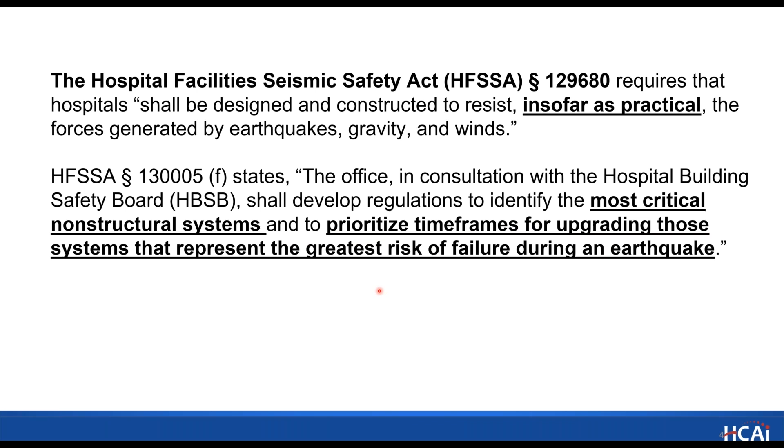Starting with the Seismic Safety Act—this is basically the background of everything. We are trying to prepare hospitals for designing and constructing to resist, in so far as practical, the forces generated by earthquakes, gravity, and winds. The NPC aspect truly focuses on the most critical non-structural systems and prioritizes timeframes for upgrading those systems that represent the greatest risk of failure during an earthquake.

When we talk about NPC, we talk about functionality, but functionality really has three aspects. One is structural—beams, columns, shear walls, slabs, foundation, the skeleton of the building. The rating we use for that is SPC, or Structural Performance Category. Non-structural covers other things in the building—partitions, ceilings, cladding, equipment, pipes, furnishing, contents, elevators, stairs, many things—we call that non-structural, and the rating for that is NPC. And of course, functionality.

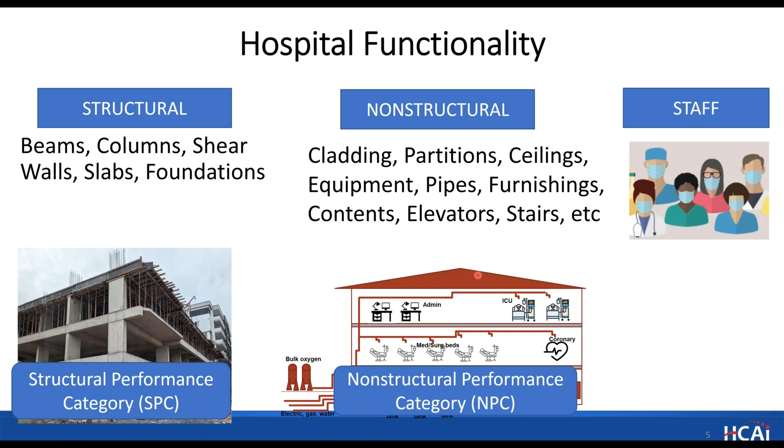Staff makes everything happen. What we're trying to do here is give doctors and nurses all the tools they need so they can do their miracle every day. The importance of non-structural systems isn't new, but the latest earthquake in Turkey showed a renewed emphasis on non-structural systems—they should be tied, braced, and thought about throughout the building to provide healthcare services after an event.

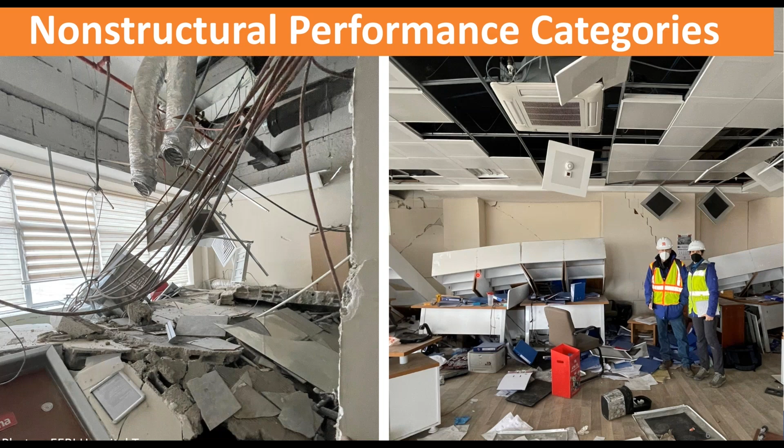So the rating system that I mentioned on the previous slide about NPC has 6 categories. I'm not going to go through this whole table, but basically 1 is the worst, 5 is the best, with steps in between. We're going to go through NPC 4D and 4 today. If you want to know more about NPC 3, I'd go back to the seminar from 2 years ago for more information and handouts.

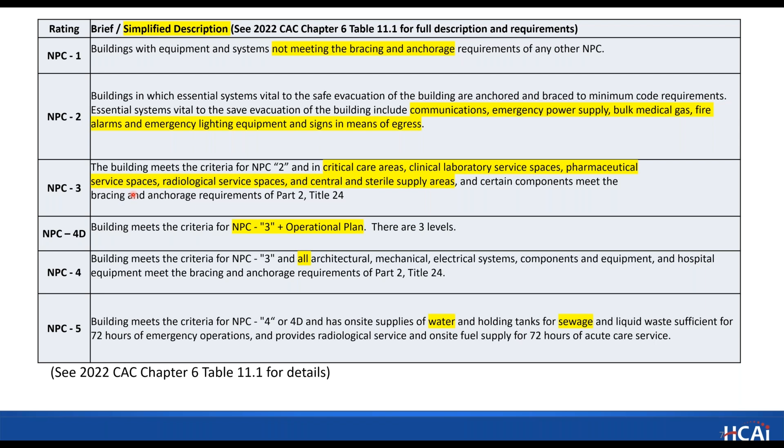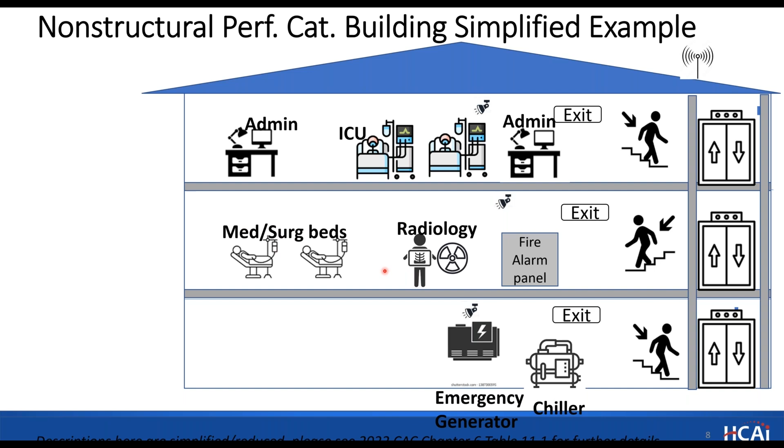I showed this sketch pretty much on all NPC presentations. This is a super simplified example. Let's say this is your hospital building with lots of functions in it: admin space, med-surg beds, radiology, and so on. All of these things work because of utilities: electric, gas, water, oxygen, and so forth. So they are all tied together, a network of systems within the building, between buildings, and outside.

As a starting point, a building's rating is NPC1, meaning either nothing is braced or nothing was looked at or evaluated. If certain evacuation systems are generally looked at, which is pretty much the scope of NPC2—bulk oxygen, fire alarm panel, some emergency generator anchorage, exit signs, some communication—very little, the building and facility gets an NPC2 rating.

NPC3, or NPC4D level 1, looks at some critical care areas such as ICU or radiology, which we call NPC3 areas. Within those boundaries, within the walls of the area, things are braced. So you'll see a bunch of bracing here, bunch of bracing here, but right outside of it, there's no brace required. So in an earthquake, if this utility line breaks here, it won't function there. NPC3 or NPC4D level 1 does not target functionality in those outside spaces—it targets tying everything around the patients so it doesn't fall on them, so they can leave that space safely.

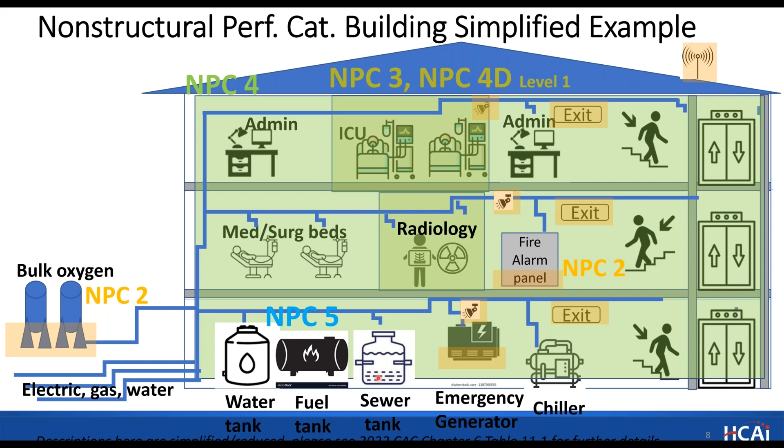As I mentioned, in the last year we received a few thousand evaluation reports. We looked at them, reviewed them all, commented, and sent them back, so we are caught up. We may have maybe 17 or 18 back-check pretty steadily, but if you haven't received a comment from us, talk to us, because you should have received all the evaluation report comments by now.

One common issue is that when we send comments out, if the contact is no longer at the facility, there might be some break in communication. But you can always log into your project and see where the comments are and when that was made.

So I'll focus on 4D and 4 mostly in this presentation. For those of you not quite familiar with 4D, the requirements are set in California Administrative Code, and you can see the details and requirements there. As I mentioned, NPC4D is basically NPC3 with levels in it—levels 1 through 3—and it's all about bracing and anchorage.

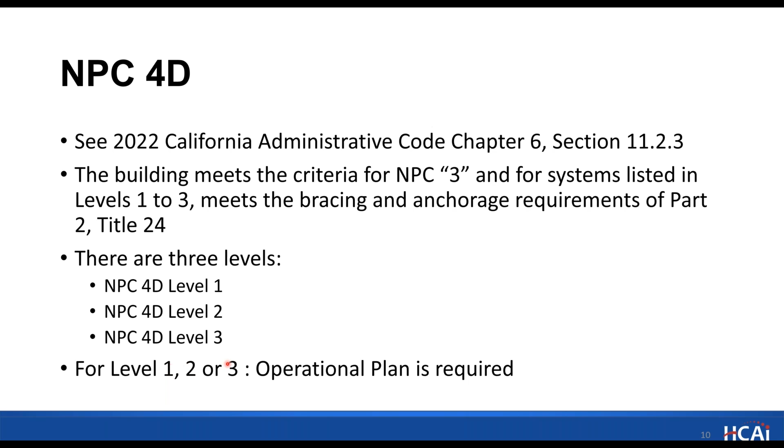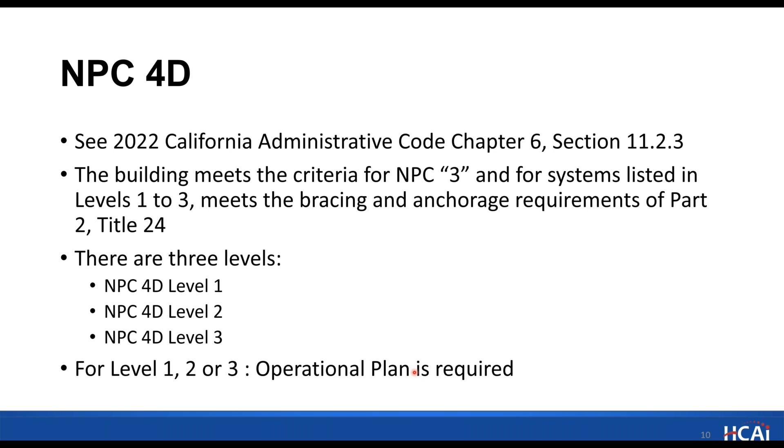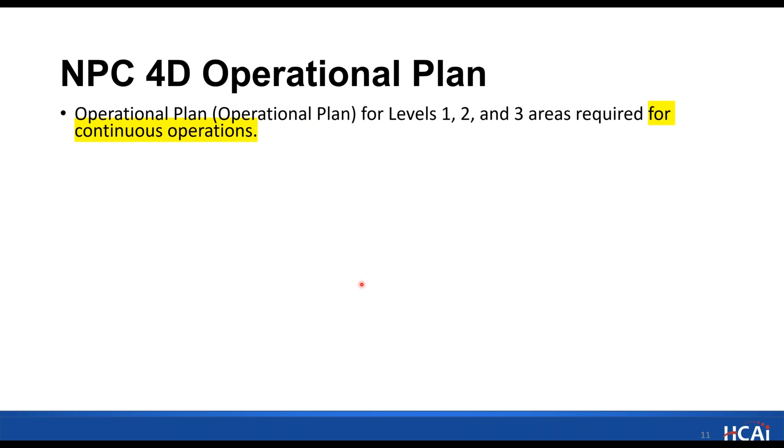On top of that, since the whole building is not braced, in order to achieve the intended operational requirement, there's an operational plan attached that comes with the NPC4D report. This operational plan is the key part of the bracing strategy. Without it, we cannot review the NPC4D evaluation. The operational plan is all about continuous operation—how can we achieve facility-wide continuous operation by looking at things in more detail.

The operational plan should not be prepared just by a design professional—it should be owner approved, and owners should be truly heavily involved in the strategy. It looks at where to brace so you get that functionality, and maybe where not to brace so you have alternative means for that functionality, which I'll come to. Again, we are looking at keeping the facility operational.

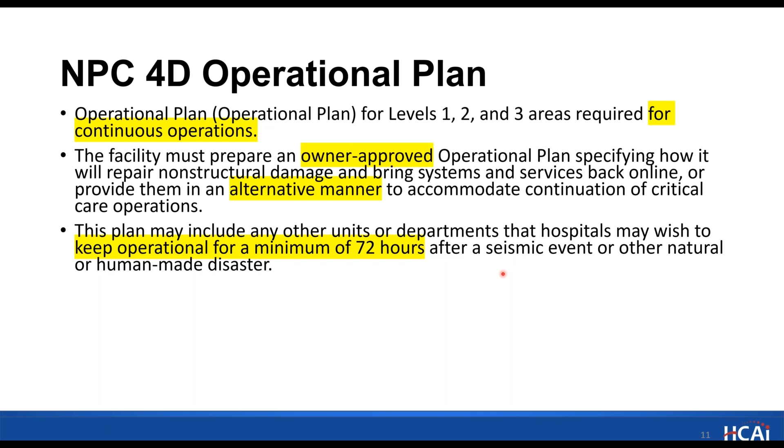The code also says that when you are submitting this, make sure that you include executive summary, narrative, management of utilities, etc.

The operational plan portion, we publish it on our website. Couple suggestions on the operational plans, since we have seen quite a bit of those. Please do not include sensitive information in the operational plan. We publish those, so do not give your staff phone numbers on your operational plans. So please clean those up.

So it is acceptable to provide two PDF files. One talks about the comprehensive version for review. The other one is more reduced for publication on our website. So it's okay to not show the shut-off valve locations in the public version, for security reasons, so that we understand some other concerns. Just let us know.

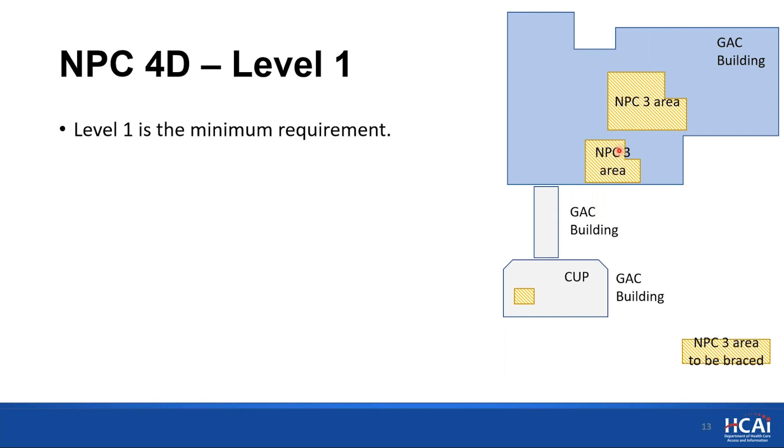Okay, NPC 4D level 1. Quickly, if I go through that - if you have a general acute care building, let me put my laser pointer back up. There are NPC 3 areas, and you have a CUP building, central utility plant, and other buildings that is on the way. Bracing these NPC 3 areas for level 1 is the minimum requirement.

Now, level 2 and 3 are optional, depending on how you want to strategize your facility operation. So some buildings may end up with level 2 or 3, but it's a strategy.

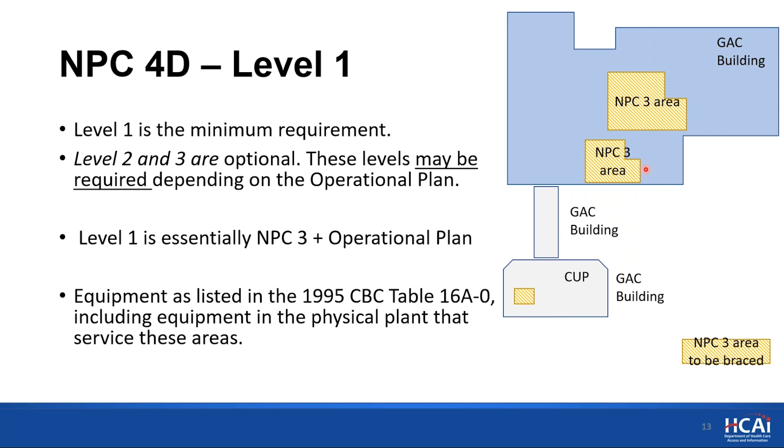One thing that we keep seeing is the design professionals focusing on just the general acute care building that they are contracted to, but NPC 3 and 4D also requires the source equipment to be braced. So there needs to be some survey of where the utilities, where the sources are coming from, and most of the time it's just a central utility plant somewhere. So some panels and some mechanical rooms, electrical rooms - those all need to be braced.

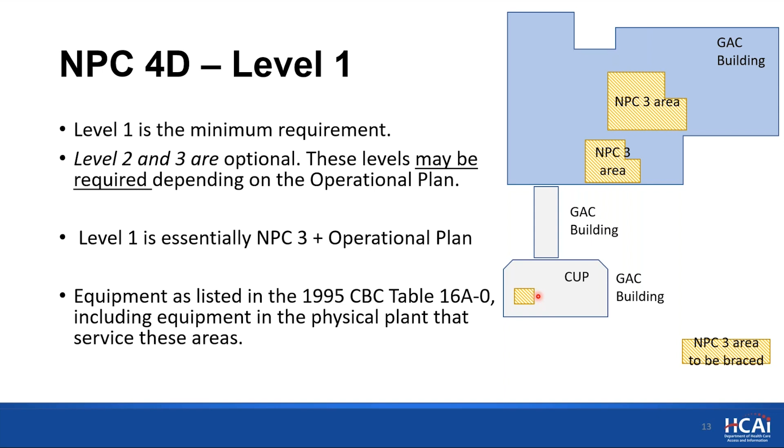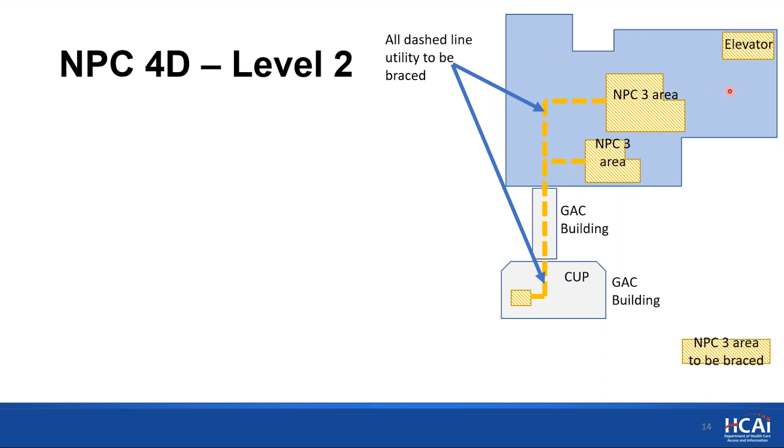Level 2 is about bracing from source to the NPC 3 areas, and these lines are all braced. So basically what we are trying to make sure is that these areas will function reasonably after an earthquake. Now, the other blue areas may not quite function because the utility lines from source to here is not braced.

So when it comes to elevators, level 2 requires - again, it's kicking me out. Interesting. Never had this before. But we'll manage. Okay, here we go.

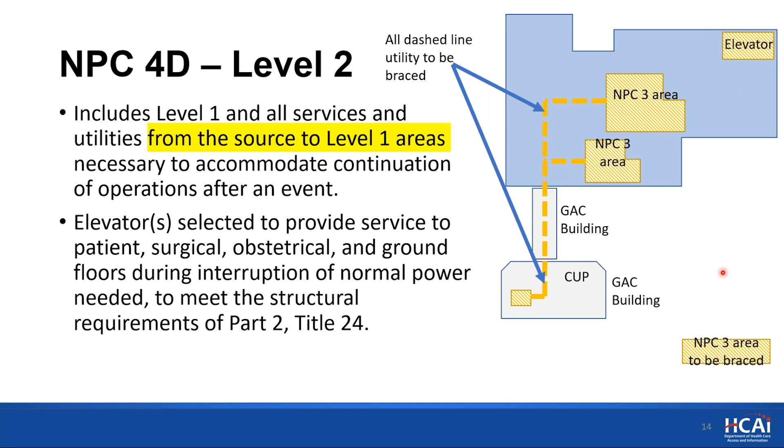Okay, so level 2, when it comes to elevator, you need to select certain elevators to upgrade. Again, operational plan is required. Now, this is something that we use quite a bit.

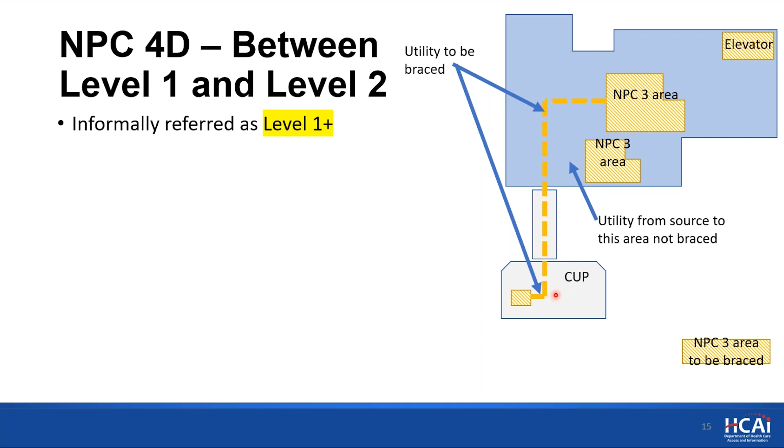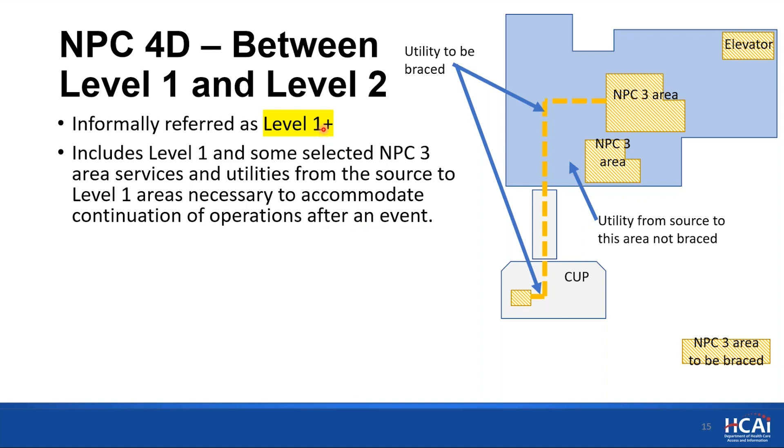Something we call level 1 plus. So it's something in between level 1 and level 2. Just think of two NPC 3 areas right here, and let's say you are bracing from source to that area, so you are basically ensuring functionality here. But this one, you have an alternative somewhere else. So you say, okay, I don't want to spend resources or money on this one because I have a good alternative in another building, so I'm not going to brace the utilities from here to the source. Which means that the critical care areas or the NPC 3 areas are not all braced. So your rating is still level 1, but your operational plan gets a whole lot easier. So there's this surgical approach that you can do to optimize what you can upgrade. And again, there's no such thing in the code that says plus - it's just a strategy between 1 and 2.

Okay, level 3 is basically level 2 with more areas that you choose. So the rules are the same, there's really nothing new there. NPC 4 is, like I mentioned, bracing pretty much everything - architectural, mechanical, electrical equipment, and so on and so forth.

One common question that we got is about NPC 3 area exceptions. So those exceptions don't apply to NPC 4 for upgrade.

And most of the time, there are a lot of past projects in the building that you can take credit for. So just think of it like you have a map with a bunch of areas that are already explored and upgraded. It's just a matter of finding gaps between those past projects and focusing on those. But please make sure that those projects that were started in the past were closed in compliance. If the status of those projects is closed without compliance, you cannot take credit, or you need to go a little more document route to see what happened in the past.

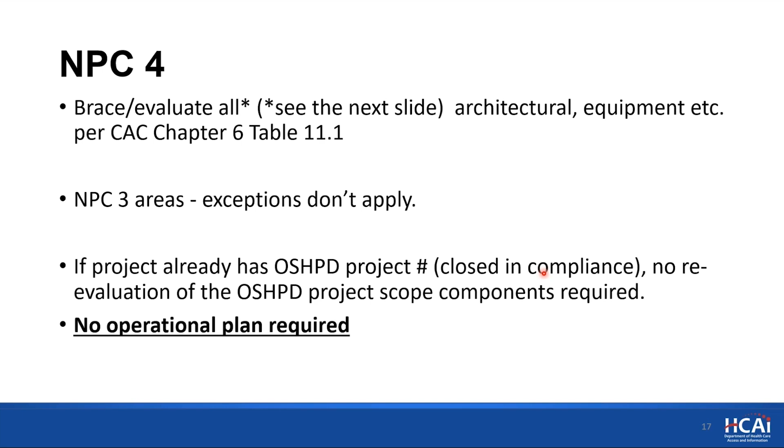For NPC 4, the nice thing is operational plan is not required, because if you brace everything in the building, the expectation is it will reasonably function. But again, no one is guaranteeing 100% everything will work - it's just a reasonable assumption.

Now people say, is it really bracing everything in the building? Well, there are some exceptions in NPC4, and I'll highlight a couple things. When something is attached to an architectural item, like walls, people ask should I upgrade all the light frame walls? The exception is when 250 pounds is attached to light frame walls, and if a single stud gets 250, then you need to upgrade that stud. 250 per single stud is a very big piece of equipment attached to the wall, so this doesn't happen frequently. The focus of upgrading light frame walls is pretty minimal.

And then there are other things, like if I put a 3,000 pound equipment, how much evaluation, how much more should I go? It's pretty flexible on how much you should go. So it's everything, but not really everything.

Now with the rating systems I mentioned, where are we on the building inventory across California? This is our latest pie chart, about a couple weeks old. The SPC, structural performance: we have 655 SPC2 buildings and 38 SPC1 buildings. These need to be resolved before 2030. The SPC1s are being resolved as we speak. 3, 4, 4D, 5 are actually good beyond 2030 - these are the good structural buildings.

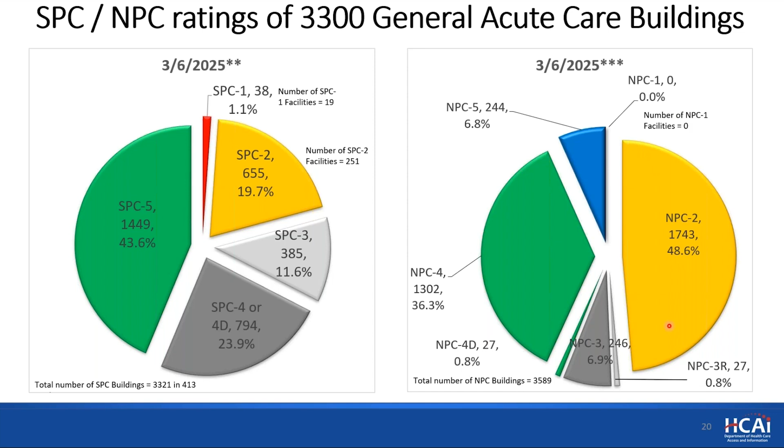Where can you find this information? The best place to go is this link, this website. You will find not only SPC, NPC, but lots of other details about your facility and buildings. We add new tabs every year or so, but some tabs have been there for decades, or a decade or two. Facility info, building list, seismic info - these are the most used tabs for NPC for the building operational plan, and the newest addition is building compliance plan, which I will touch on in this presentation. But please go to the previous presentation to learn more about the building compliance plan.

If you click on the building list seismic information, this is what you see. I want to focus on one column, but in this table you're going to see the building details, the name, the year, the code, the height, and the rating. We keep updating many things, but this NPC status really talks to what we are trying to achieve with this presentation. This gives the status of the NPC upgrade. Now you may say, what do these things mean? There's some text, so I broke it down. Let's take a look at the options here.

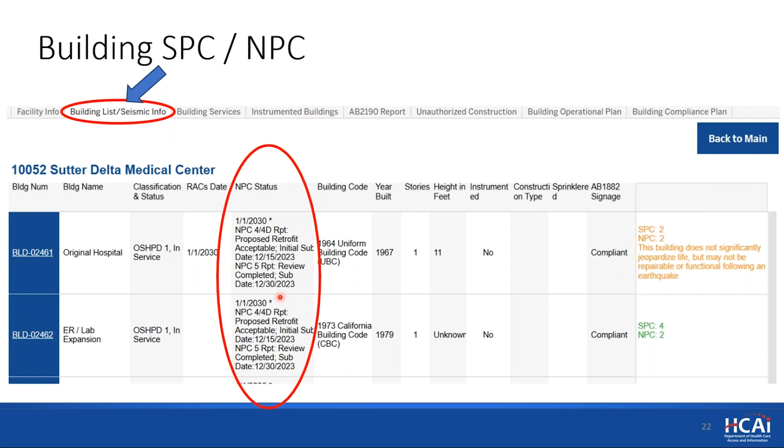If the NPC status shows not submitted, basically it's pretty straightforward - the evaluation, we have not received the evaluation report. If you think this is a mistake on our website, please reach out to us and we will fix our mistake. But if it is not submitted, it shows not submitted.

Awaiting review means the report was submitted or resubmitted for back check and it's queued for review. If it says in review, which means it got triaged so it has the right components and documents in it, now it's in review. If it says review completed, it means we sent the comments out - please respond to the comments.

If you see proposed retrofit acceptable, it means we received the evaluation and accepted the scope. We sent a letter saying we are accepting the proposed retrofit, and the next step is putting together the construction documentation and building it. If you see intent to remove general acute care, GAC, it means we received a formal letter from the facility saying they intend not to continue general acute care services in this building after 2030. So we put this building in a different category, which I will talk about later.

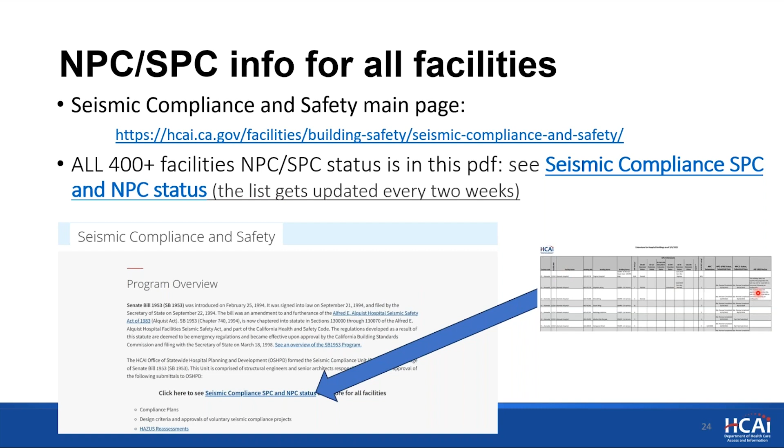If you go to our website, Seismic Compliance and Safety, you're going to see a link that shows everything. So 3,000 something building statuses are there. It's a PDF, and you may say, well, I need Excel. The way we created this PDF from Excel, if you save this PDF as an Excel file, it will convert to Excel very cleanly. It's by design, so you can sort and do all kinds of statistics if you want to.

All right, so now we know the rules, now we know the inventory, what are the deadlines? I want to start with NPC 3 compliance deadlines. I know this is 4D and moving toward that, but we still have a little NPC 3 compliance deadline issue. We have two seismic design categories, D and F. F is very high seismic area, D is high seismic area.

There was a deadline that says all the NPC 1s and 2s need to be NPC 3 by this date if you are seismic design category F. So out of 43 NPC 2 buildings, we have 40 NPC 2 buildings with this deadline.

Now, about 24 of those are done, they are in the process of basically getting the paperwork resolved. So my target is 16 buildings in 9 facilities that need action immediately. If you haven't heard from us, that means you are not in that list. If you did, you know.

Okay, the other deadlines. For the NPC 4, 4D, and 5, the NPC compliance deadlines have been set for a long time. But recently, in the 2025 code, with the addition of AB 869 and the California Administrative Code revisions, there were two little additions in between. The first one: January 1st, 2024, that's the submittal deadline for non-structural evaluation for all hospitals. So there's no change there.

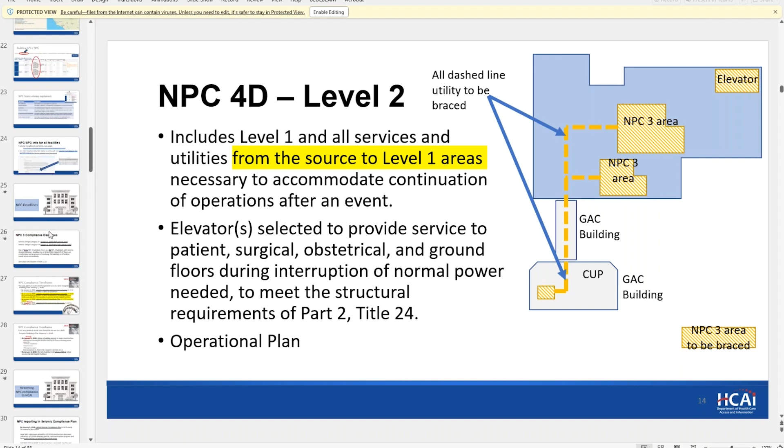So by January 1st, 2026, all facilities need to submit a seismic compliance plan. Again, please take a look at the previous webinar. By March 1st, 2026, all hospitals, whether you are seeking delay or not, need to submit construction documents for NPC 4, 4D, and 5.

By March 1st, 2028, that's the deadline to obtain a building permit. And for the ones that are not AB 869, the finishing date is January 1st, 2030. Whatever extension the AB 869 facilities get, that will be their deadline to finish construction.

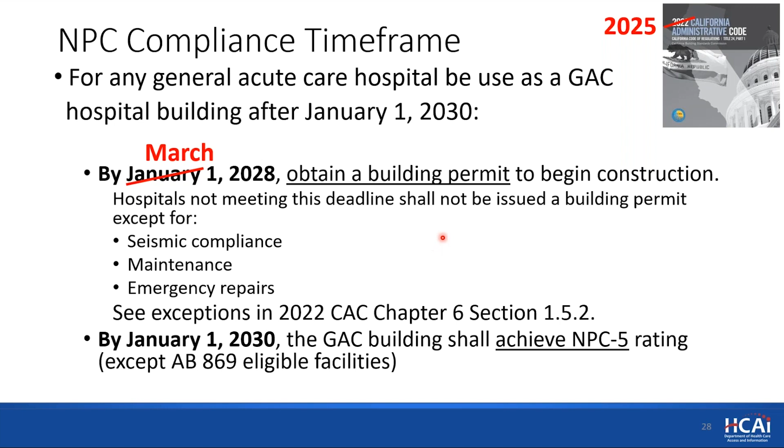You may ask, why did January move to March? Because we are a deadline-driven industry, most people submit at the last day or the day before. January 1st is generally not a good time because everyone is on vacation, and bringing the design professional back from Christmas vacation when things are needed is not fun.

Reporting NPC compliance to HCAI: so those are the deadlines, but how can we keep track and report whether they are met or not? We will do all of that in our new automated seismic compliance plan. Again, I highly recommend looking at the previous webinar.

The way we will be asking everybody is please put the NPC milestones in the seismic compliance plan for 4D and 5, and the time of submitting the construction documents, the time of getting the permit, and completing. We're going to be asking you to put all that in the seismic compliance plan.

So how do you do it? Basically, you use our guide. This is the ESP e-services portal user guide, section 21. This walks you through step by step on how to log in, access, and use the menus. It's more like a software user guide. We also published Pin 80, so you can look at the background behind it.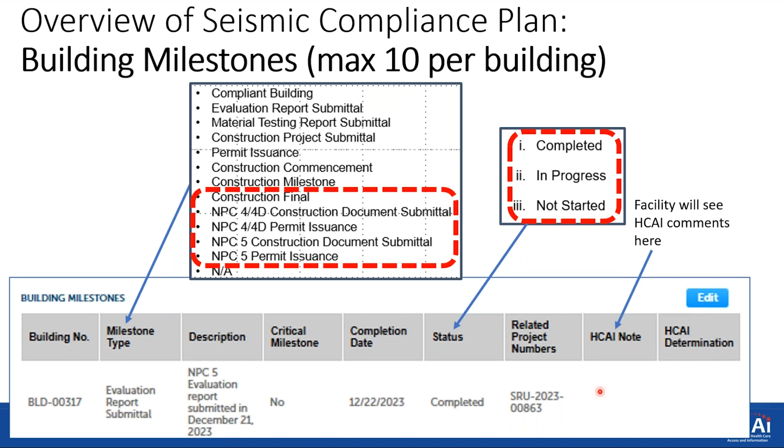Again, I basically noted down how we're gonna do this. Then there's a little nuance on 4, 4D, and 5. For 4 and 4D, each building has its own plan, so some upgrade to 4D, some upgrade to 4, some demolish it. So it's building by building.

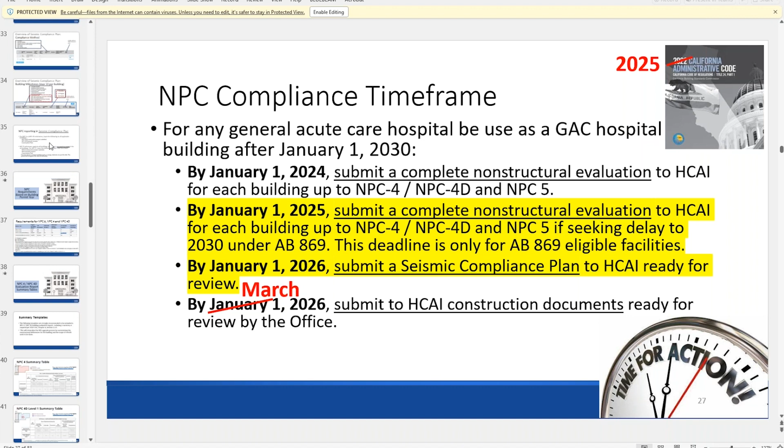We'll have an IT talk. There we go.

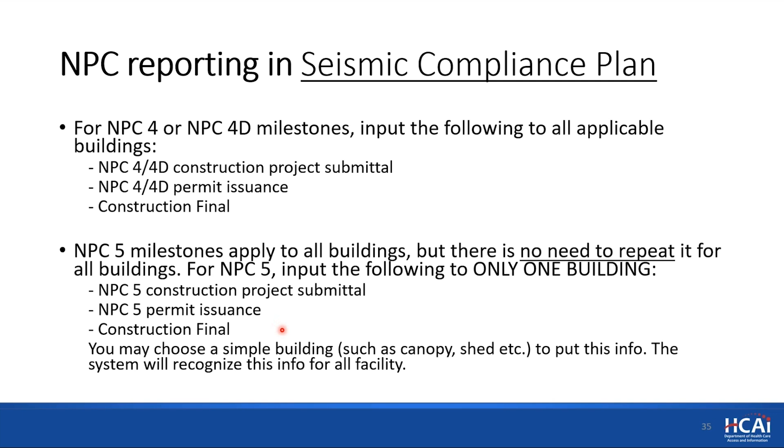So you can choose a simple building like canopies and sheds, and you can put the NPC 5 dates there. And when you do that, the system will recognize that there's an entry of NPC 5, so we will assume that this is for the entire facility, which generally is.

Okay, so now I'm gonna start going into the details of NPC 4 and 4D. I'll talk about some nuances, some frequently asked questions. So we'll basically touch on, again, a lot of nuances here.

One thing that I would start with is the big picture of the building. The older the building gets, the more scope of work that needs to happen. So we have categories, and the best place to start is to figure out how old is the building. What was the permit year of the building? What was the construction year of the building? So start with the age.

When you start with the age, the very important thing to identify is who was the permitting agency. Was it local, like city or local jurisdiction, or was it OSA, which is the agency, or kind of OSHPD, and then we split from OSA and we became OSHPD. Was it under the OSA jurisdiction, or was it under our jurisdiction? Depending on the year, the scope gets very minimal or nothing, and as you go towards local, the scope gets more. So prior to 1973,

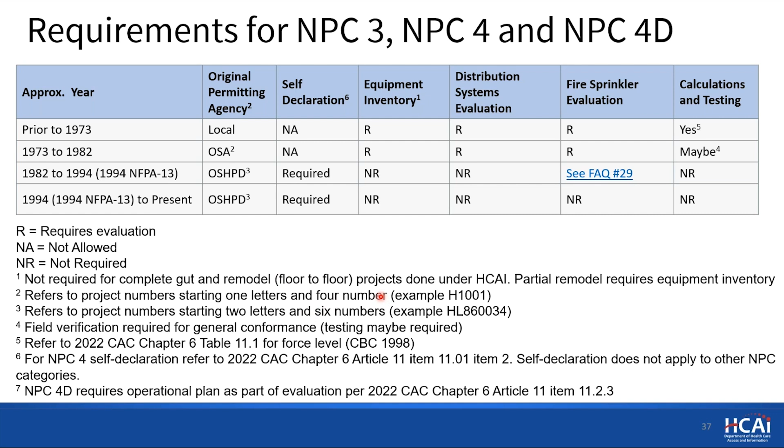So there is some upgrade needed in this era. If you are after 1994 and the fire sprinklers are 1994 NFPA 13 designed, then you have no scope of upgrade in 4 and 4D. You still have NPC 5 to do, but again, this is not about bracing, so take a look at the footnotes for this. But again, it's very important to start with the age.

The reports, once the evaluation is done, it's important to summarize what's the scope of work, like what are we trying to upgrade, so the engineer knows. But it's sometimes very difficult to track what's truly needed.

The code says a narrative and a summary table is required, but after seeing many evaluation reports, we started commenting that you've got to have a summary table that everyone can follow. So we came up with a template. We are strongly recommending to include a summary template on the first page. Again, we are here today, we won't be here tomorrow, your engineer may not be here tomorrow, so to keep track of what has been done, the summary tables are super important.

So we came up with a summary template. You can click on this link and download it if you choose to. I'll explain this table a little bit because it's important.

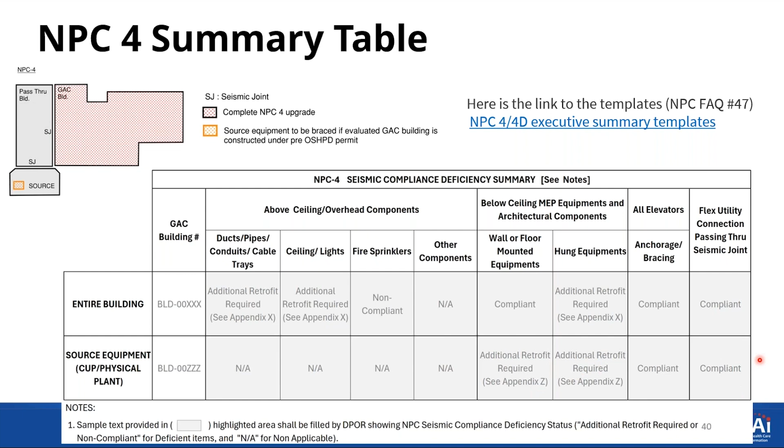And same for source equipment, what's the status of that one. NPC 4D level 1 summary table is a little different than NPC4. Again, some similar items, but...

Now you're not talking about the entire building in terms of bracing. You are now talking about areas within the building and the source equipment wherever those source equipment are. So give us the details on what the plan is, so that when you go to this building in the future for hung equipment, if you open a project and finish the retrofit, you can come back and say yep, this item is done under this project, so now it becomes compliant. Well, okay, you still have those two items that we need to see projects for. So it starts addressing things on a more high level.

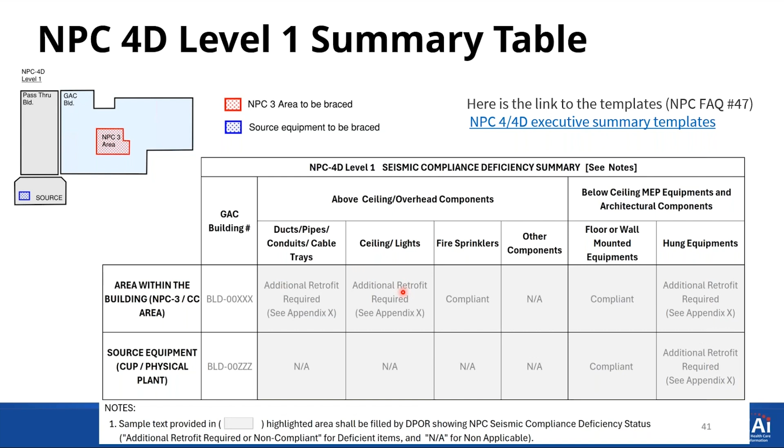NPC 4D level 2 and 3 summary table is again a little different than level 1. Again, you can download the templates here. I want to quickly talk about the setup: you have the source building, a pass-through building, seismic joints, and NPC3 areas, additional areas, elevators. These are basically surveyed, so these are utilities to be braced. So how are we going to prepare a summary table for that?

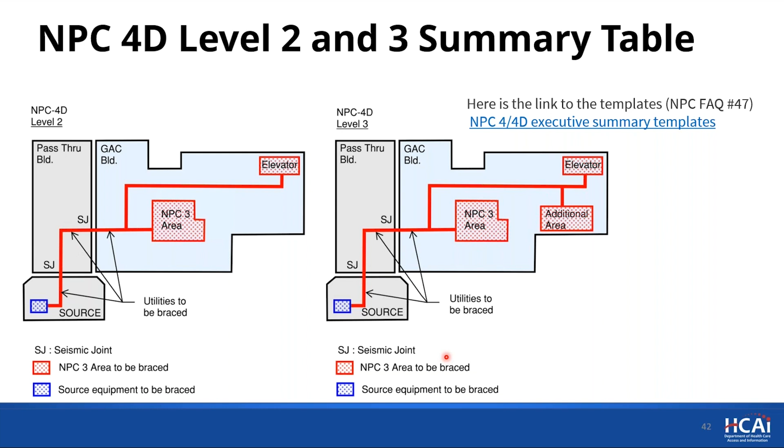Again, I'm going to start with the bottom line. The source equipment, tell us which building it is in. Tell us where the utilities will be passing through, because those are the buildings that you will have projects in. And utilities in passing, again another pass-through building, and this is your main building. If you identify these, then you can start checking these things off as you make progress.

The reason we are emphasizing pass-through buildings is NPC projects come with many little multiple projects, so it's very easy to keep or lose track of the focus. When you have many little TI projects touching many different parts of the area, you may start wondering, well, did I do this pass-through building or not? So anyway, this is something helpful. If you have better suggestions, we are open to look at it. All we are trying to do is make the scope and tracking easier.

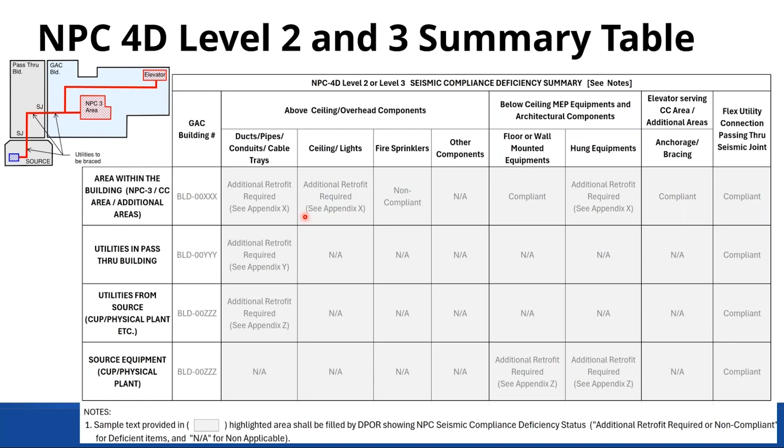So then we'll say, okay, then all we need is the NPC3 area bracing, not source to area. So again, this gives us a big picture on how you're approaching your functionality.

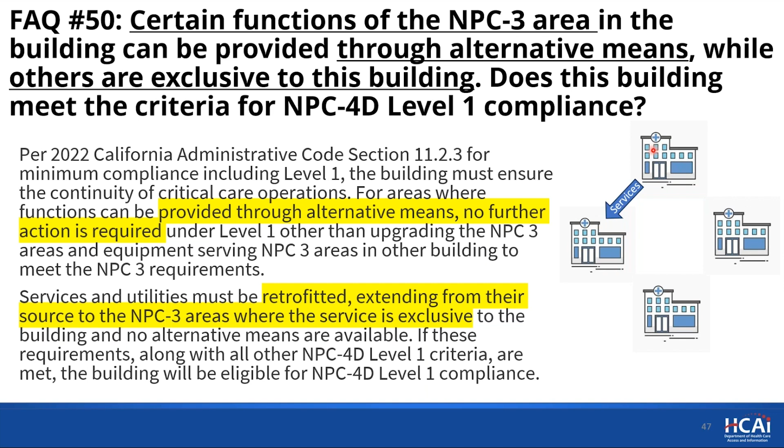What if I have the same facility and I want to do level 1 on every single one of them? What we started seeing, which we are pushing back on, is: this building will have the services somewhere else, this building has services somewhere else, this building has services somewhere else. So the entire facility cannot be NPC 4D level 1. You cannot just keep the services out of this building within the same campus.

The argument we keep seeing is, we're going to shut down the facility, and there's another facility probably within, I don't know, X number of miles. Again, an evacuation is the last resort option, not a design target. We are designing the facility to provide services after the earthquake. So therefore, all buildings in the facility cannot be NPC 4D level 1.

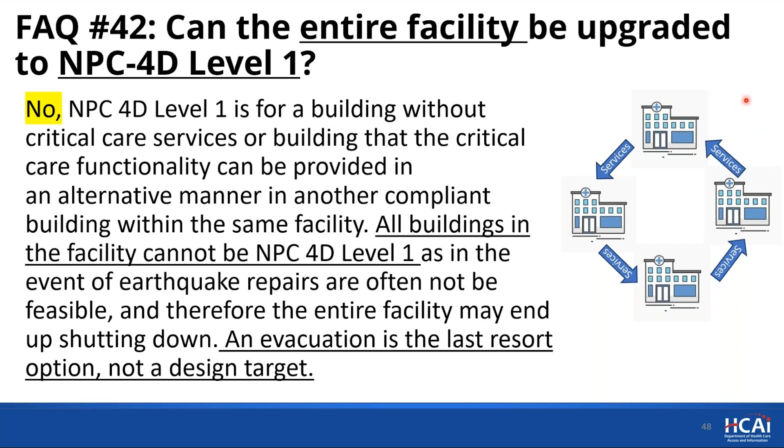What is the minimum number of elevators? For level 2 and level 3, a minimum of 1 elevator. This is a pretty basic requirement, so that hasn't changed.

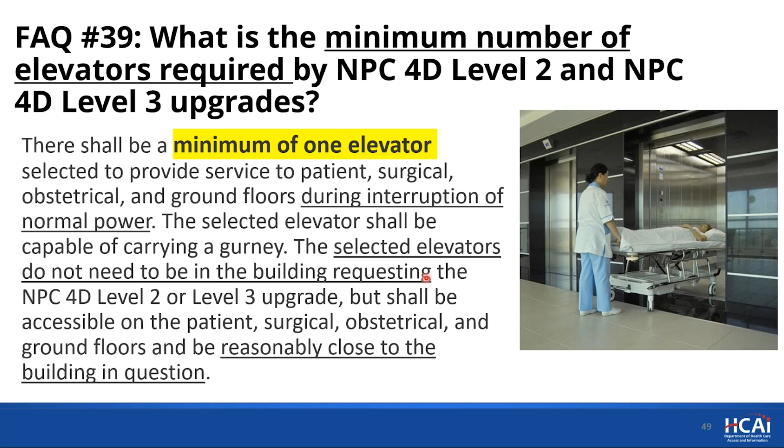The other question we get quite often is: I have a central utility plant, there's no inpatient services in it, so can I do level 1? This means that the equipment will be anchored, but all the utilities above will not be anchored. So obviously the operational plan will say the entire facility will be shut down because the central utility plants are so critical to the facility. A non-functioning central utility plant is basically detrimental.

Rather than going back and forth many times on the operational plan, we are basically getting to the point of saying that central utility plants as standalone buildings need to be NPC 4 - meaning please brace everything in those buildings. Again, the code doesn't say central utility plants has to be NPC 4, but the code says your operational plan needs to ensure continuous functionality. So not bracing the central utility plant defeats the purpose of the operational plan. So cutting the chase, the central utility plant needs to be NPC 4.

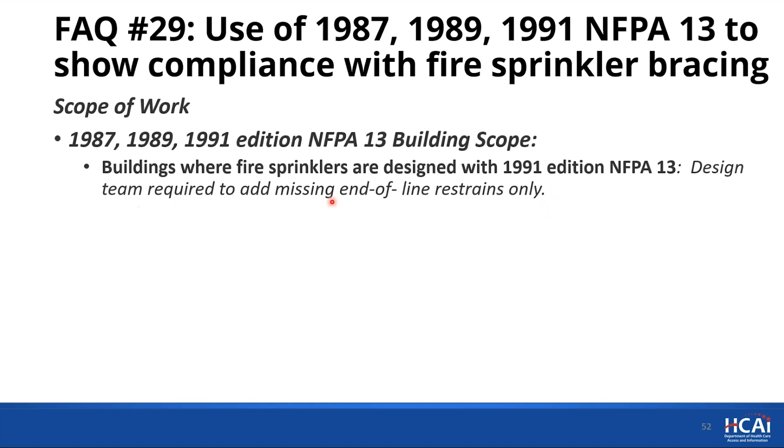Fire sprinklers. I presented this in previous webinars, but I'd like to touch on it because for OSHPD buildings from 1982 through roughly '94, most of the time the only scope is fire sprinkler bracing upgrade. The upgrade isn't just black and white between codes—there's a progression of requirements throughout the NFPA for fire sprinklers. So if you know what version of NFPA was used, we can tailor the scope more efficiently. If the building is 1994 NFPA, you're good.

If you're on the 87, 89, or 91 edition, then some verification or upgrade is needed. Generally the concern with these editions is the end-of-line restraints. In an earthquake, those fire sprinkler heads basically get cut off and flood the whole hospital, so we want those secured.

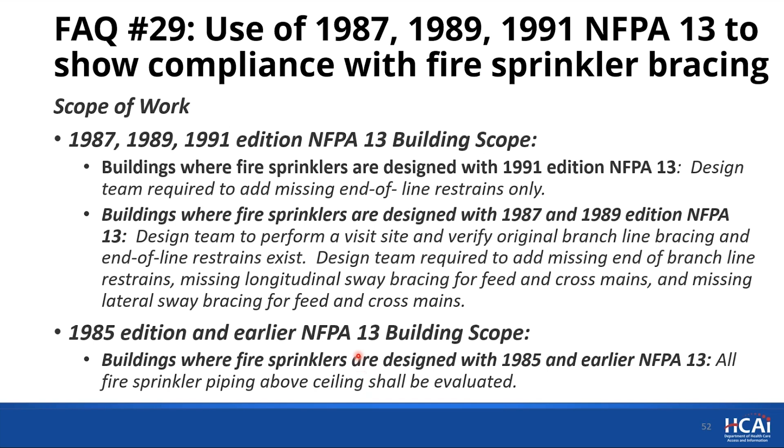Going back further to around '87, you start seeing missing branch line bracing in addition to end-of-line restraints. It's a bit of a mixed bag, so don't assume the worst—have your design professional look at several places in the building to come to a conclusion. Before the '85 edition, an upgrade is generally required.

Some other frequently asked questions. This comes up quite often, especially now that we're going into the construction document phase. Hospitals come and say, we decided to fully renovate this area, full gut floor to floor. So should I really go through the inventory of things I'm going to demo? What's the point? We agree—so in the evaluation report, cloud that area and state that full renovation will be done for all items. Then you don't have to include the list of that equipment in that area.

But that means you need to submit a project by March 1st, 2026 for that renovation, get a permit for it, and complete the renovation by January 1st, 2030. So basically your retrofit is carried out through different projects.

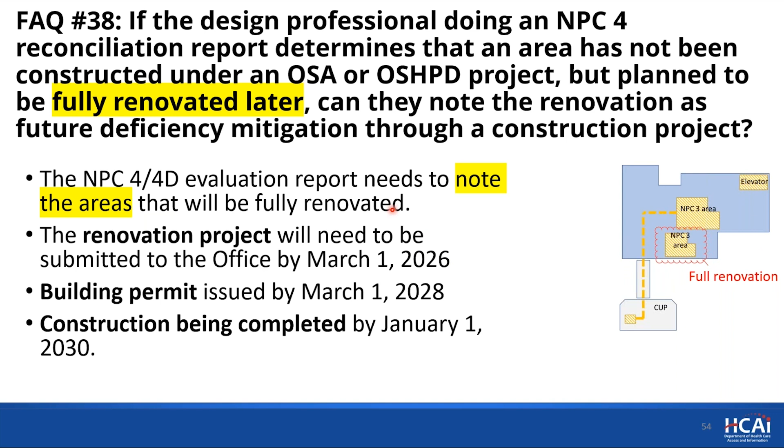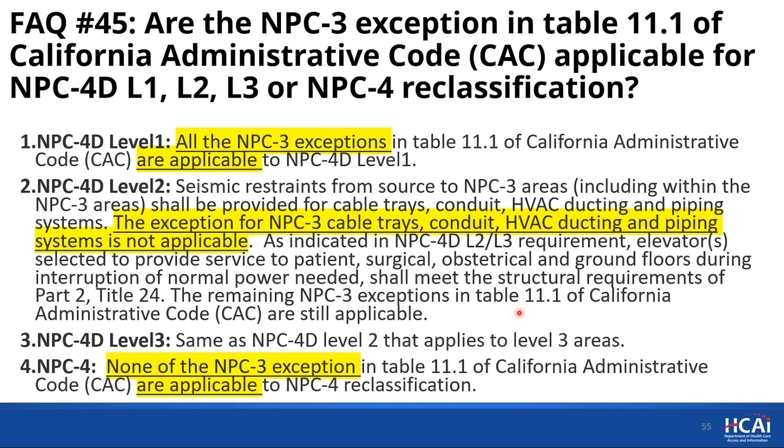Now, this is another big thing: flex joints.

As more buildings come to the inventory of a hospital, things get added, the utility pipes are extended to the next building, and then the next building, and then the next building. And during those changes in the campus, a lot of times what we started seeing is...

When the utilities are passing through the seismic joints, not all of them got flexible joints. So these things do allow movements between buildings. Bracing a pipe is much easier than cutting a pipe and putting a flex joint. So we came to a conclusion that it may not be practical to cut these pipes everywhere. It's just you need to shut down the hospital a lot of times. So in many scenarios that we have seen, it's just detrimental to the whole campus if you try to cut every single pipe to make sure that this is done.

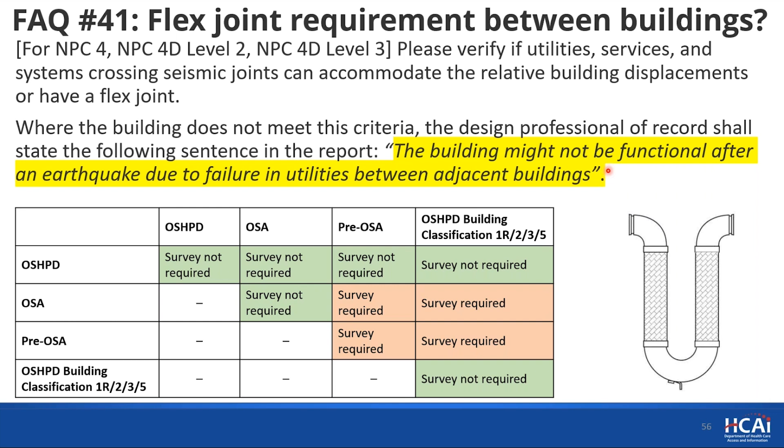The requirement for piping suspended by individual hangers - this comes again as a frequently asked question a lot. Again, the codes do change over the years, so that's why it gets thicker and thicker as the code years increase. So the exceptions do change.

So people say, well, I like the exception in 2019 code, but I don't like it on the 2016 code, or vice versa. Can I do a mixed soup of exceptions throughout many code cycles? The answer is no. You need to stick with one code that you are applying and stay consistent with that code cycle. So people say, oh, I'm going to use 1998. 1998 does have exceptions, but it's not as detailed as the subsequent codes. So if you're going to choose 1998, you have to live with the uncertainty of those exceptions. If you use a later code, things get more clear, but some flexibilities on your hand may go away. So anyways, your design professional will decide which code cycle to pick and stick with that. The code says 1998 code or later codes. It's not a combination of.

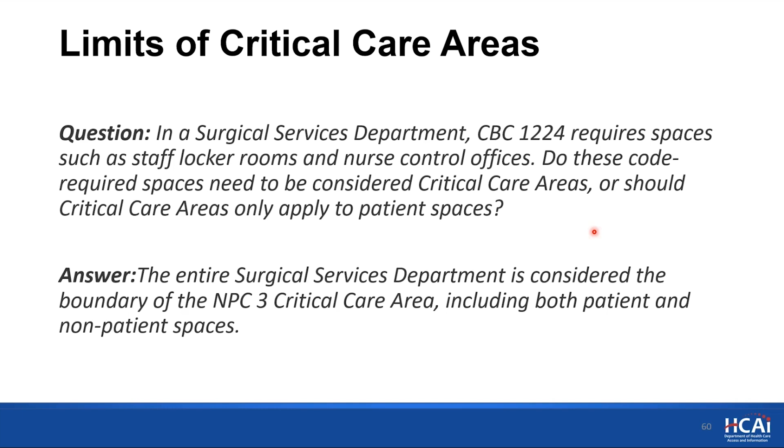What I want to point out is there was a slight revision in the 2022 code for testing existing anchors for equipment. So we no longer require shear testing if there's no tension in that anchor, and there's a little more clarification about how to test the existing anchors. So it became a little more palatable and flexible in terms of testing requirements.

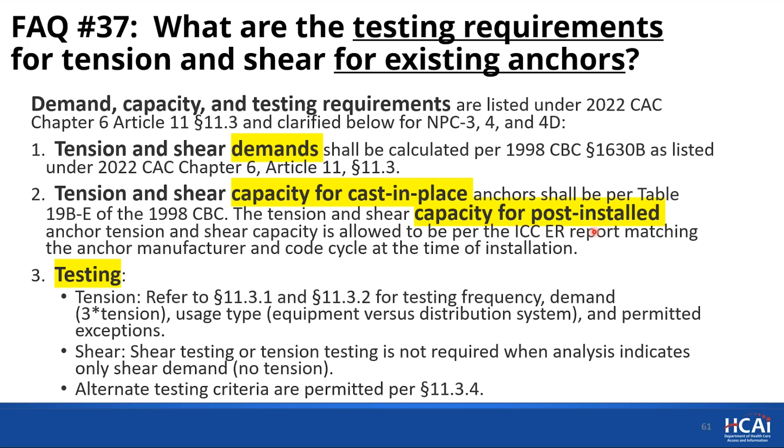Okay, what if you have a building that won't provide acute care services beyond 2030? What are the steps that you want to take? Maybe you already gave NPC for 4D report. So what are the options?

Number one thing is, please submit an application with a letter of intent. It's just one page from the facility saying that our intent is not to continue GAC services in this building beyond 2030. You may say, well, then why are we putting a project if we're just going to send the letter? The thing is, the intent may change, the intent may evolve.

So we want to keep track of all those changes within a project number. In the seismic compliance plan applications, we specifically added a line item for you to use, and it says intent to remove GAC.

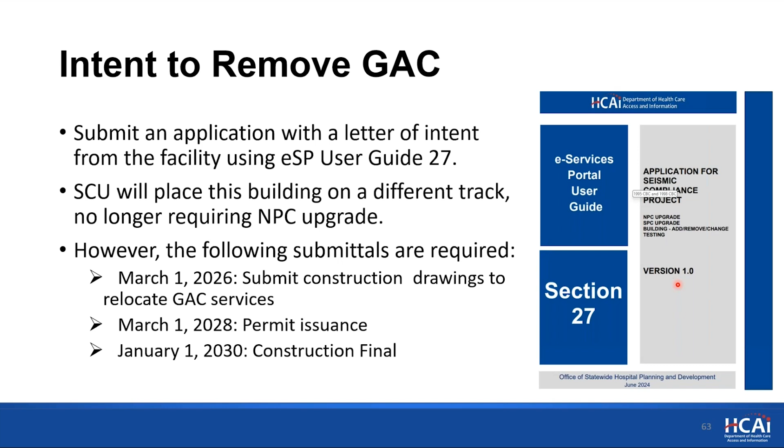But once you do that, we publish that building as intent to remove GAC, and we put you on a track with the expectation that you're going to be submitting construction drawings to start removing those services, by March 2026 for the drawings, March 1st 2028 for the permit issuance, and finally finishing January 1st 2030. With AB 869, that construction final may change a little bit, but the deadlines pretty much remain the same.

Now I'd like to spend the next half an hour on our new advisory guide, A13. We published this back in November, December last year. Since we are now going towards the construction side of things on the NPC, we came up with this as an option for facilities to consider to expedite the construction.

Again, this A13 guide is not a magical solution. It's just an option. If it makes sense, we recommend you use it. If it doesn't make sense, the traditional method may actually work better. So this guide is only for existing ceilings and above-ceiling utilities.

The reason we came up with this is that during evaluations, a lot of times the design professional could not see or were not allowed to enter into several ceiling spaces, and the utility evaluation was either missing or not complete. Going into those spaces many times, disrupting operations, was a huge issue for some buildings.

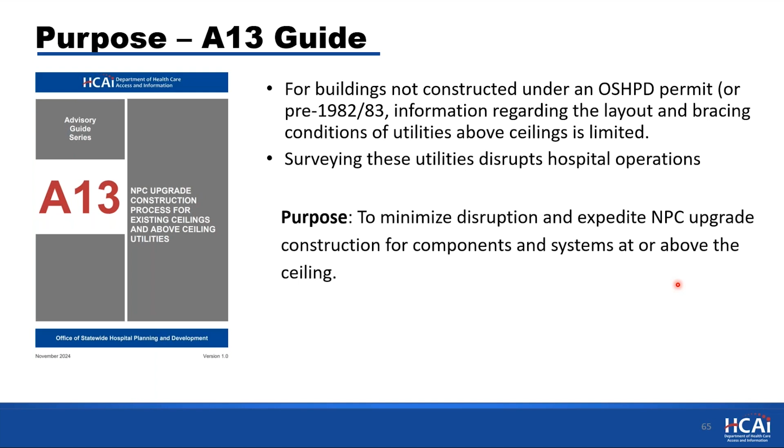I'm going to emphasize this probably ten more times: the guide is only and only for existing components and systems for NPC upgrade. This guide should not be used for new equipment, wall-mounted equipment, floor-mounted equipment, new systems, or deferred submittals. Again, this flexibility is coming from the reason of not seeing what you need to brace beforehand.

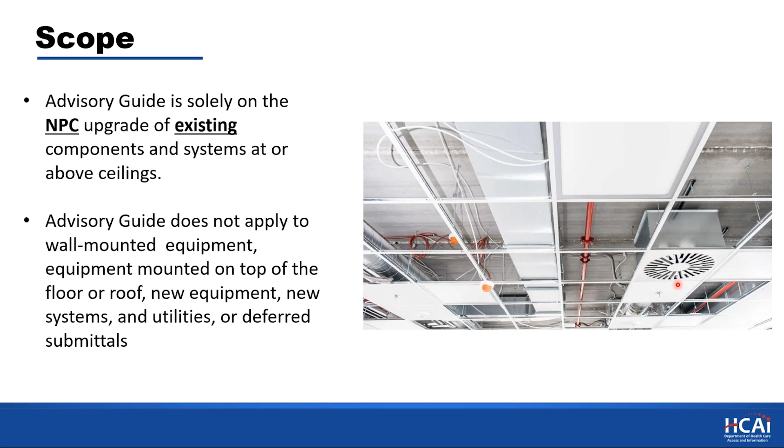Deferred submittals are not permitted, and I'll come to that in more detail for the A13 guide. If you have a TI project, we want the TI project to follow the standard process, but that doesn't mean you cannot use that room with the A13 guide. You can, and I'll tell you how. But make the TI project traditional, with the NPC upgrade of utilities as its own project.

Okay, the first question: should I use the A13 guide for my building? How would I know that my building is a good candidate for the A13 guide? The starting point is, how much do you know about the conditions in your building? That's the big question. So let your design professional look at all the existing drawings, details, and site visits, gather as much information as possible.

Have an understanding about what comfort level of detail you have on hand, on paper. If the survey is comprehensive and the DPOR says that this reasonably reflects existing conditions—not 100%, nothing is 100%, but reasonably—then if that's the case, you don't need the A13 guide. Go to our typical HCAI process, because if you know things, you know where to put the braces.

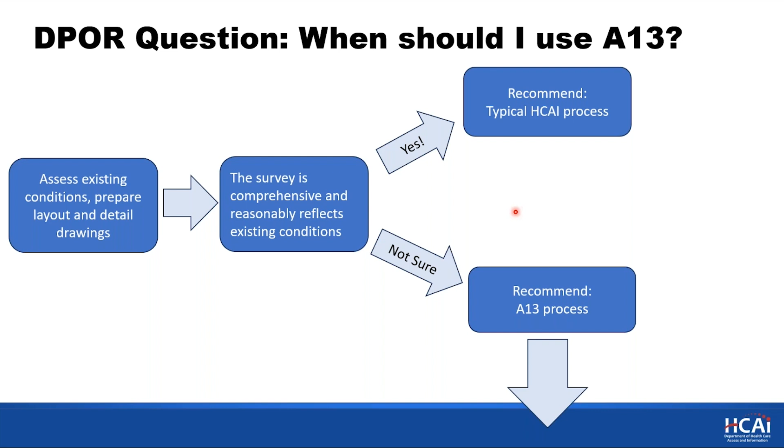I know this is a long flow chart, but this is the only way to explain this whole A13 guide in one run. After I go through this flow chart, I think the other slides should make more sense. So let's see how the river flows.

So we start with the existing drawings. Prepare as much as you can, gather as much information as you can, put it on the drawing. Everything you put beforehand will save you time and money.

While doing that, the DPOR should really visit the building, and prepare the typical details as much as they can to get the right details. For example, we don't want to see typical concrete details for a wood building. So don't throw in unnecessary typical details just to put everything in it. It has to be building specific and site specific.

If it's a high seismic zone, obviously the bracing recommendations will be different than in a low seismic zone. So building specific is key, but we're not expecting you to know all the layouts. You just need to observe a few locations to make sure you're in the ballpark of things. And quite honestly, I was on the other side too for many years.

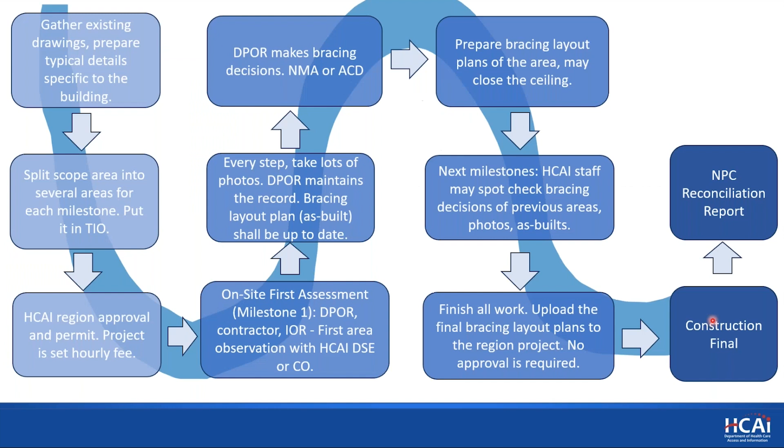You're going to see a version number at the bottom of the A13 guide. We published initially in November, and our latest version should go out today, if not tomorrow morning, showing a new version number. Please download it tomorrow and see—we made some changes in the A13 guide, not big changes, but a lot of clarifications.

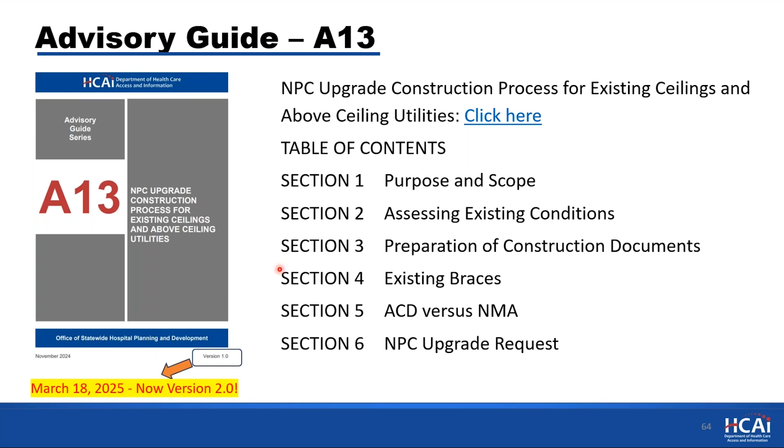In the future, we want to do version 3.0. We want to include some examples as we go through the A13 guide, so it's a dynamic guide where we are hoping to give more examples, more visuals, so that it becomes more usable. The fundamental process remains the same, hopefully, so that we make these NPC projects a success.

Okay, with that, let's talk about some details of the A13 guide.

What about using more than one OPM? Yes, you can use more than one OPM, because most likely your building is a soup of OPMs and other stuff. So you want to be nimble on what OPM details you want to pull from the typical OPM details. It's acceptable as long as you do your study about what existing conditions are there, so you bring the right OPM details early on. You can't just point to an OPM and call it, saying we're just going to install this. No, you need to show the details on the drawings you are going to construct. Just pointing to an OPM is not acceptable. This is nothing new.

Now, architectural floor plan, when you are starting on the bracing layout plans, you need to show the room functions so that we know where you are upgrading. Please don't just give us a list and expect us to know where these layout plans are. You need to show the room functions and define boundaries of where this work is happening.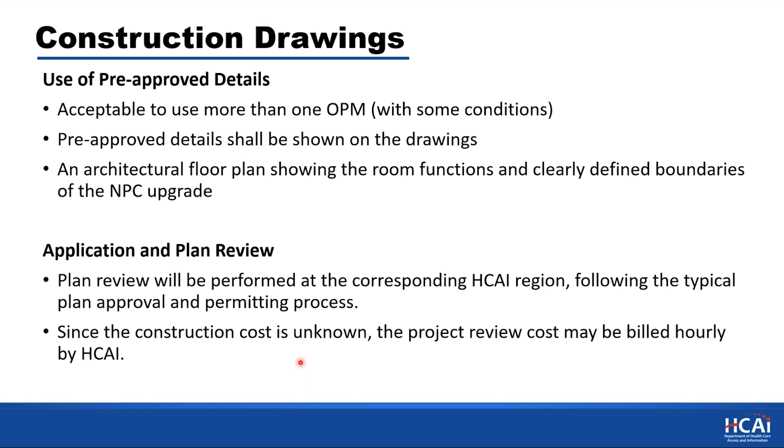Again, application is time and materials, because you don't have a construction cost. For TIO forms, again, it's important to put the milestones in the TIO form. This is your design professional of record's document. So please do not let IORs or contractors run your TIO. TIO is a design professional's document, and this is super important.

Again, pre-construction meeting, communication. Communication is key on the A13 guide. Don't assume things, pick up the phone. If there is any issue, talk to us. If there's a misunderstanding, bringing it up early on will save a lot of time.

Now, let's say you start with the A13 guide, right? And you are going through the TIO process, and if you see that things are not working out, there are some issues dealing with existing conditions, or there's just too many cases where the OPM just doesn't cut it. Like every single time, if you find yourself sketching new, outside-of-the-norm details, that's time to leave the A13 guide process and continue with our traditional process. So there's nothing wrong with switching to the traditional route if things are getting really detail-intensive. Anyways, you have a chance to switch.

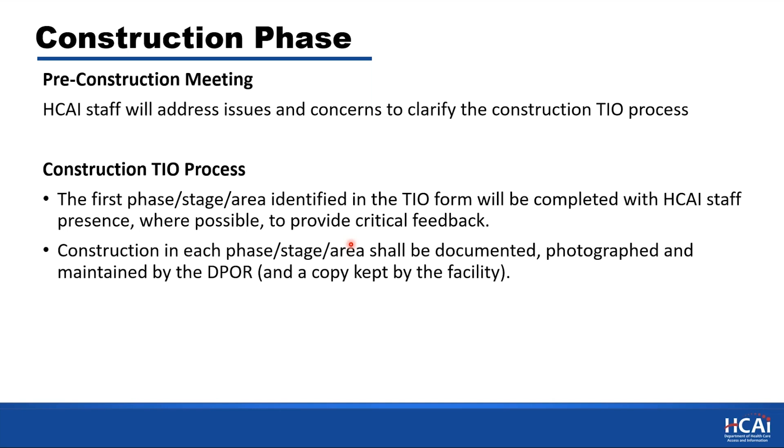Again, I want to emphasize photographs. Photographs are key, because when a question comes later, you can just pull up the photograph and show this is what we have, what we saw. A lot of times that may save you from reopening or disrupting that space. The one little caution: when you take a photo up close, nobody knows what you are looking at, or how thick it is, or how long the pipe is. There's nothing that replaces the human eye, so there are some limitations on photographs. When you take a photograph, don't expect everybody to understand what we are looking at. Anyway, it's just a word of caution.

Site verification, again, we will be relying a whole lot more on the design professional's records, keeping track, processing, communicating the site verification, the dynamic nature of existing conditions. So we will be relying on them a lot. The decisions that will be made on the spot, when you open it up, have to be made by the licensed professional. Again, do not let the contractor make the decisions for you. This is very important.

So when a condition is revealed by the contractor saying, hey, this is what I'm seeing, what should I do? The licensed professional will say, okay, put this brace using this detail and let's put it on the bracing layout. So licensed professionals are not a review entity of contractors' decisions, they are the decision makers.

So the braces that are added during construction should be laid out on the drawings, with accurate locations identified by the DPOR. So when our field staff asks for the current bracing layout plans, it's like a daily report, so we are expecting that to be available. And if a photograph is asked for, it should be shown to our field staff. Keeping a good record and making it accessible is very important.

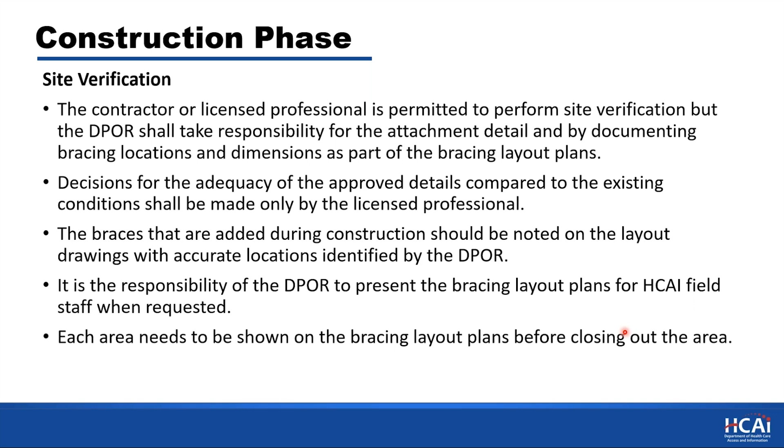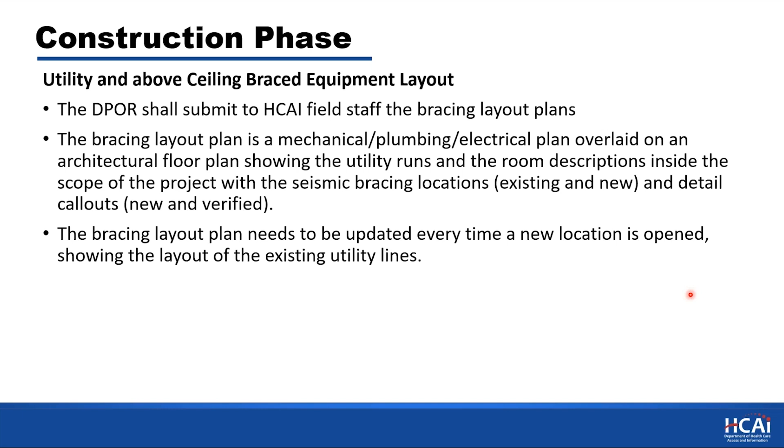Okay, I mentioned these a couple times. So existing utility lines, when we say please show those, we put some nuances on how much is too much, like do we show every single little pipe? So take a look at the A13 guide, we put some nuances on how to show, how much to show, so that you don't put every single little thing.

Again, keep a good track of what's going on, what's being braced, what is included in the area and what is not included outside of the area. Please be very clear.

Let's say you showed all of these and later you start changing your mind, or maybe later on at a milestone, the HCAI review revealed a lot of discrepancies. We may ask to go back and look at it, and if things are missed a lot, then there might be some destructive investigation to reopen ceiling spaces. In order to prevent this, continuous good communication with good record keeping should prevent the destructive investigation.

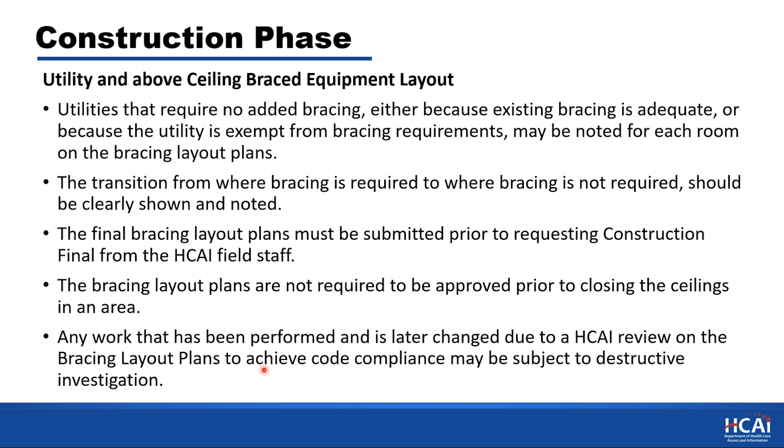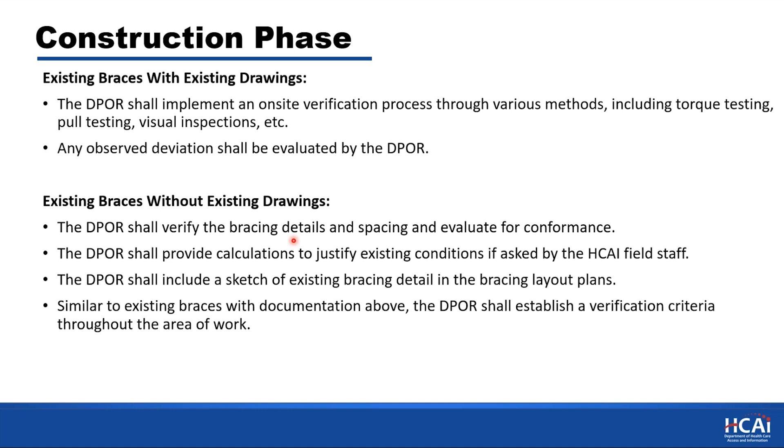Again, with existing drawings, without existing drawings, there's obviously a little more work that needs to be done when you don't have existing drawings. Again, we are relying a lot on the DPOR to make those calls. I mentioned this in the flow chart.

ACD versus NMA. Again, this is the heart of the A13 guide. It's important to understand what we call NMA versus what we call ACD. So OPMs are your friends. This whole A13 guide does accelerate if you stay within the boundaries of OPMs. If you're outside of it a lot, then maybe this may not be as quick or as time-saving as you may think.

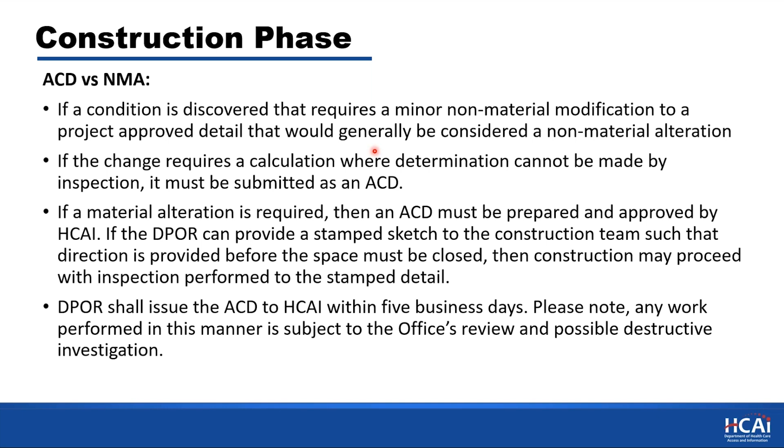Okay, there are some other little details about NMA versus ACD. Again, please take a look at the A13 guide. It gives a little detail about how to approach an ACD versus NMA.

Final closeout. Again, it's important to wrap up the bracing layout plans, show all the boundaries clearly, submit that PDF to the original project, and please state that to our field staff so that they check that off, saying, yep, that's submitted under that project condition.

We are not asking you to upload the photographs, because the photographs will be, I don't know, terabytes of data. So we are asking the facility to keep the photographs till you get the NPC5 rating itself, which might be several years down the road, because if anything comes up later on, like what about this area, what about that area, photographs will be very helpful.

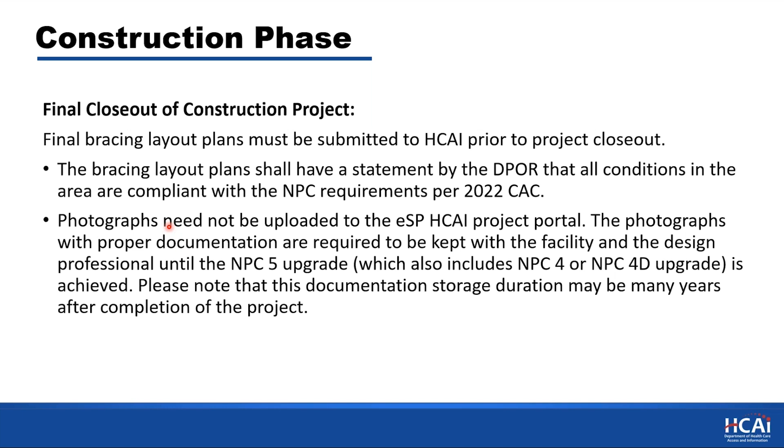So again, the photographs should be available during construction, and should be kept like a record drawing, like when you keep your record drawings in a hard drive. Please do keep those photographs as almost like a construction document till you get NPC5. After you get your NPC5, I still recommend keeping them because it's valuable, but seismic compliance unit will not ask for further information about those.

After everything is done, please visit or go back to the SRU evaluation project that you initially submitted. Remember all those summary tables. Do update those summary tables saying, yep, this portion of the summary table we upgraded using this project. So the reconciliation should wrap everything up on those deficiency lists. And then if everything checks out...

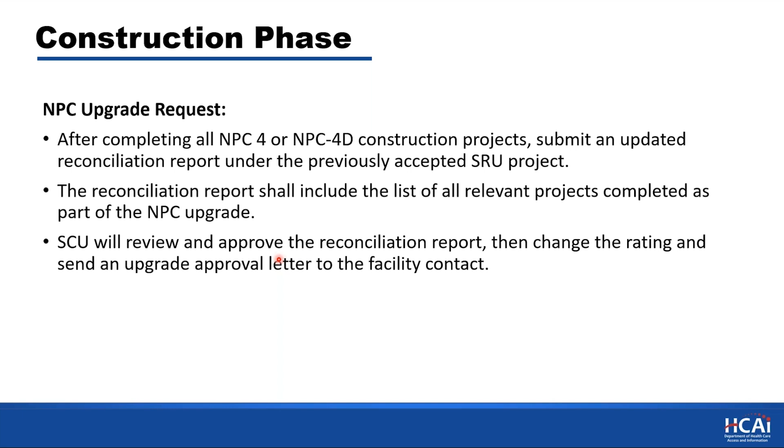Submit those reports to seismic compliance, and we will take a quick look to see if there are any gaps. And if there are no gaps, then we will give the rating. So again, the whole idea here is fewer disruptions with the A13 guide, and the DPOR are more in control, and reduced number of ACDs and NMAs.

And I want to close with the TI project item, which we talk about in the A13 guide. When you have an equipment upgrade in a room, keep that project separate from the A13 guide NPC upgrade of the utilities. It doesn't mean that you cannot go in the same space at the same time. You are just keeping track of things in two different projects.

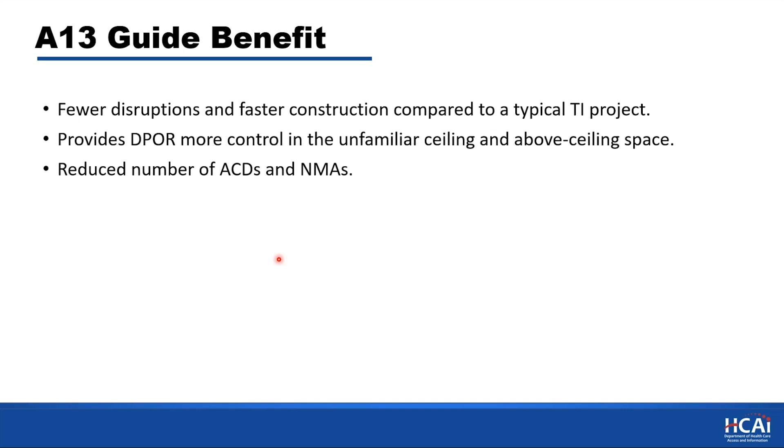We don't want you to use the A13 guide just for one room or two rooms. So make it a building-wide project so that you keep track of all those things, because those pipes and conduits go everywhere. So the idea here is having a good tracking tool for what's upgraded and what's not upgraded.